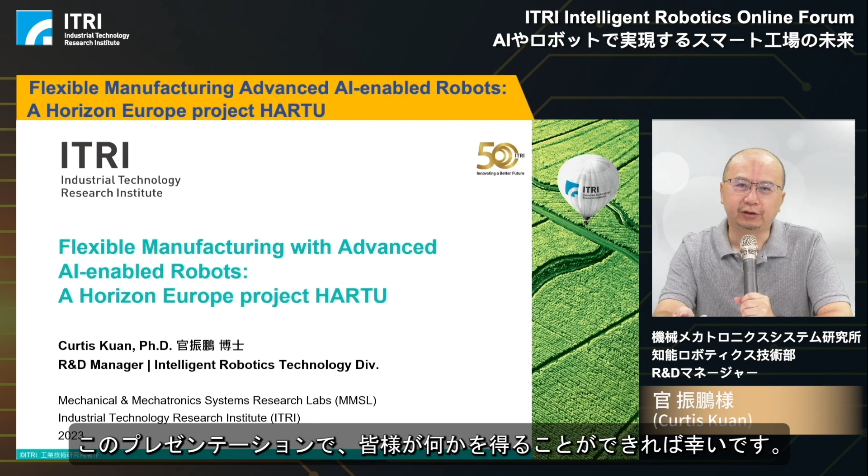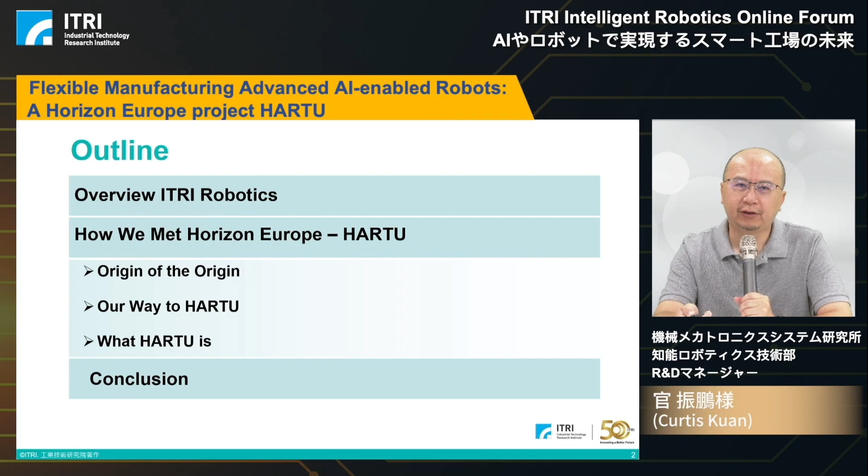First, here is the outline of today's presentation. First, a brief overview of ITRI Robotics is introduced. Then, how we joined the HARTU project, including the origin, the progress to HARTU, and what exactly HARTU is. Finally, a conclusion is provided.

As we know, ITRI was founded in 1973. It's an independent nonprofit innovation institution in Taiwan. Our scope is developing technology for commercialization and nurturing open innovation with academia, industry, and global partners. That is why I am here to introduce our global collaborations, especially with European partners. The other scope is incubating and spawning startups for emerging industries. As we know, the most famous spin-off companies are TSMC and UMC in semiconductor areas. Each has several offices around Taiwan and global branches in Tokyo, Japan, San Jose, Silicon Valley in the United States, and Berlin for European business.

Here is our basic information about ITRI. We have Tainan campus, headquarters in Hsinchu, and Taichung campus. We have many staff with PhD degrees, master degrees, and total patents around 32,000 and more.

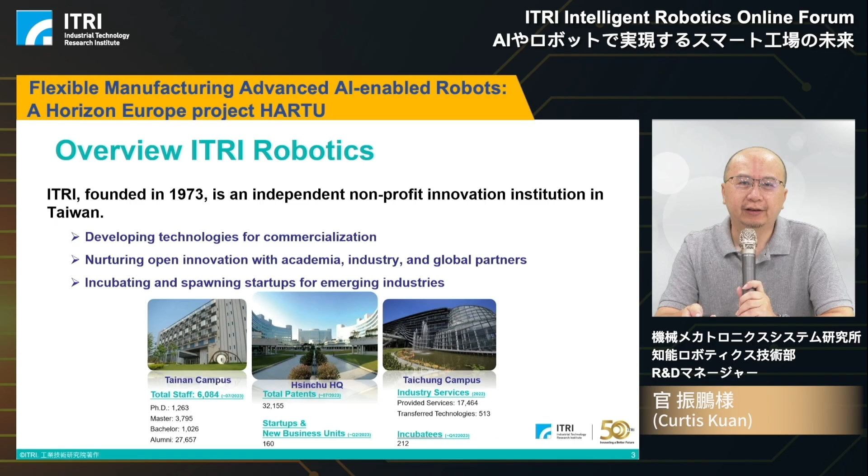This slide will introduce our robotics achievement in the past years. For the future, we have robotic development in ITRI. We have core technology related to controllers that we call I Can Think. The vision system for robotic system that we call I Can See. And several applications, use cases in the practical industrial area. We call it I Can Work, and the mobility, I Can Move.

For I Can Think, we especially developed the robotic controller and the navigation algorithm and simulators with EZSIM and ASim. The vision system for the robotic system we call FOVision, especially for object recognition and navigation.

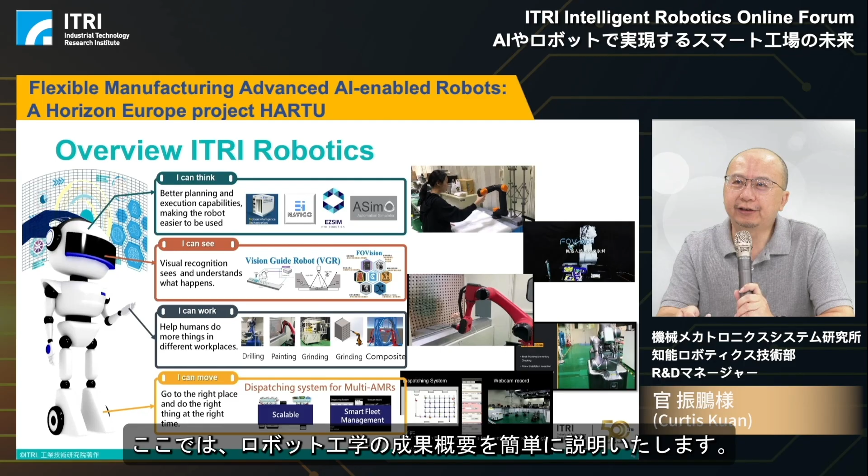And I Can Work, we have implemented several industrial applications such as in aerospace manufacturing, drilling, or painting for high-speed railway, and grinding and polish application for semiconductor instruments, and robotic weaving system for composite material handling. And I Can Move, we have developed the dispatching system for multi-AMRs, and a fleet management software for AMR systems. This system right now is introduced to a semiconductor plant. Furthermore, we also have medical robots as our focus, such as robotic bronchoscopy with diameter less than 3.5 millimeters. Here is our brief overview of our robotics achievement.

Here, the next page, we want to say how we met Horizon Europe, how to.

And I want to introduce the origin of the origin. From 2002 and 2003, we joined the European project called Muffins. This project is related to multimedia processing in the MPEG 21 environment. ITRI is one of the partners, and the other partners are Imperial College in the United Kingdom and IMEC for Belgium and other partners from all over the European countries.

And the other project from 2003 to 2005, we got another partner from Switzerland. Based on our research capability in the past, almost 20 years ago, we joined these two projects.

From these experiences with European partners such as Fraunhofer, Imperial College, IMEC, Vodafone, we have learned several lessons. The first one is the basic core concept idea is very critical. Use cases and user scenarios first. Then, based on this user scenario and requirement, we can implement the technology development.

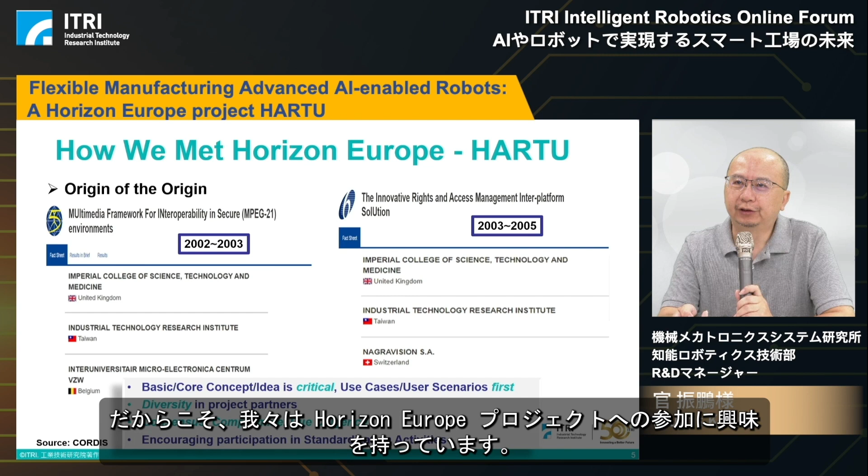And in these projects, they encourage participation in standardization activities and promote the achievement from the project to standardization organizations. So from these experiences, project achievement will be more applicable to the real and practical use cases in industrial applications. That's why we are interested in joining the Horizon Europe project.

So here is the slide showing our way to HARTU. In 2017, from the EU-Taiwan Industrial Policy Dialogue, we decided we need to discuss AI robotics. EU and Taiwan agreed to focus on the development of AI plus robotics and start the preparation of a robotics working group. And in 2019, we established the EU-Taiwan Robotics Working Group.

In this working group, we discuss regulations, policies, and joint research topics, especially on AI, data, and robotics. This group is established based on the consensus of European Commission Director Generals, for example DG Grow, DG RTD, and DG Connect, especially for ICT technologies.

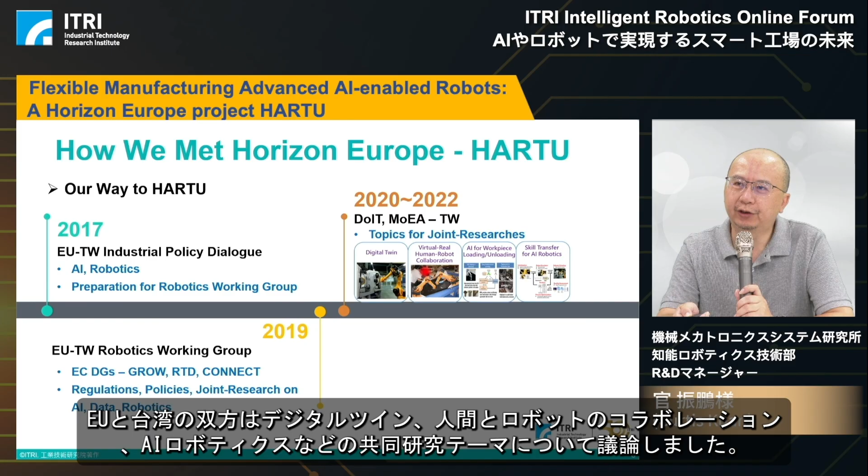Through 2020 to 2022, both sides of EU and Taiwan discussed joint research topics, including digital twin, human-robot collaborations, and AI robotics.

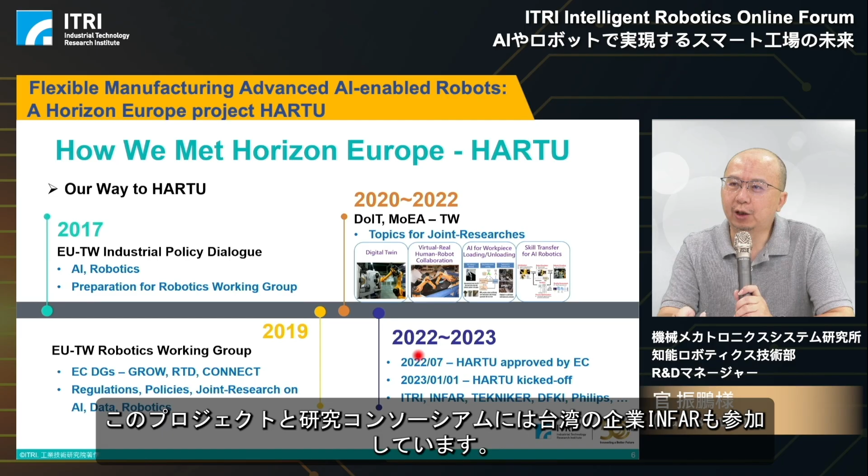Based on our consensus from both sides, in 2022, ITRI cooperated with the German AI Research Center DFKI, the Spain Research Institute Tekniker, Philips Consumer Electronics, and the Turkey automobile company, forming a research consortium. We call it HARTU. This project got approval by the European Commission, and the project kicked off this year in January. In this project, there is a company from Taiwan, INFAR, which also joined this research consortium.

In HARTU we want to focus on 5 use cases. The first one is fixtures assembly, especially for hand tool manufacturing, and this use case will be implemented by ITRI and INFAR, the Taiwan partners. The second use case is assembly for consumer electronics, implemented by Philips and Tekniker, and this use case is from the Netherlands.

And the logistics use case and car assembly transport, this use case is implemented by Tekniker and TOFAS, the Turkey automobile manufacturer. And especially for the packaging use case, it's about food handling, implemented by the Italian partners, Poliva.

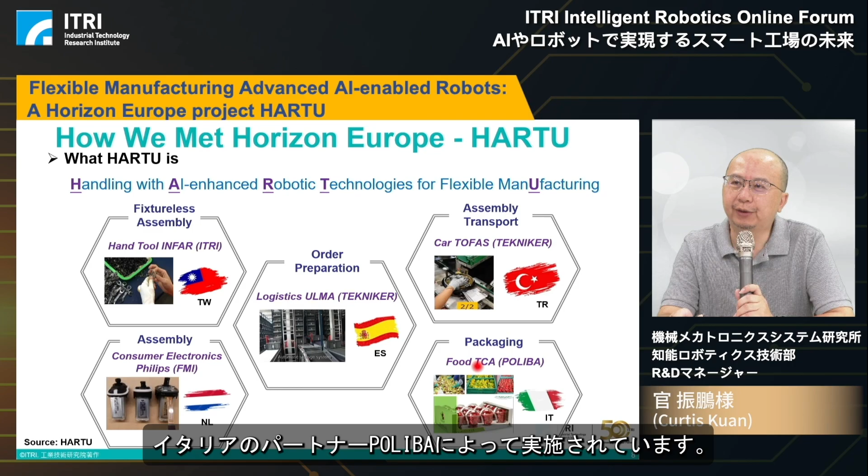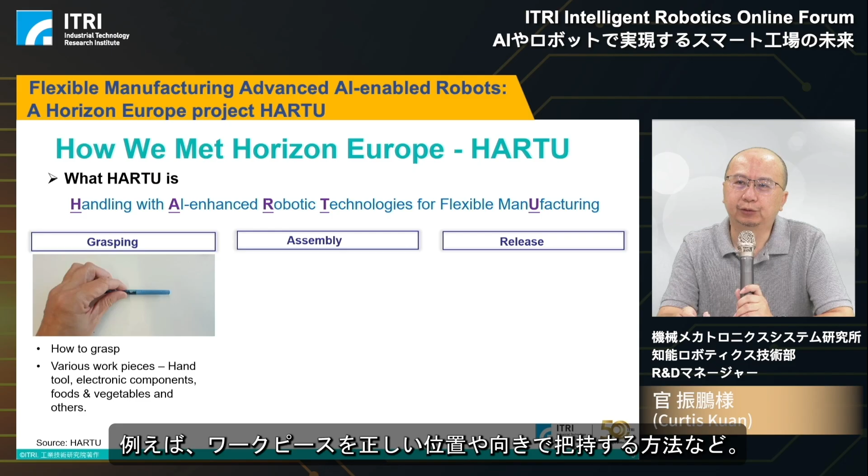In these use cases, we want to focus on how to grasp a workpiece, such as how to grasp the workpiece in the right position and the right orientation. We will handle various workpieces such as hand tools, electronic components, foods and vegetables, and others. From grasping, we need to assemble all the components into one product, so we need to handle the contact force, assembly procedure, accuracy, and compliance between the workpiece and the adaptation to various workpieces with different sizes and weights.

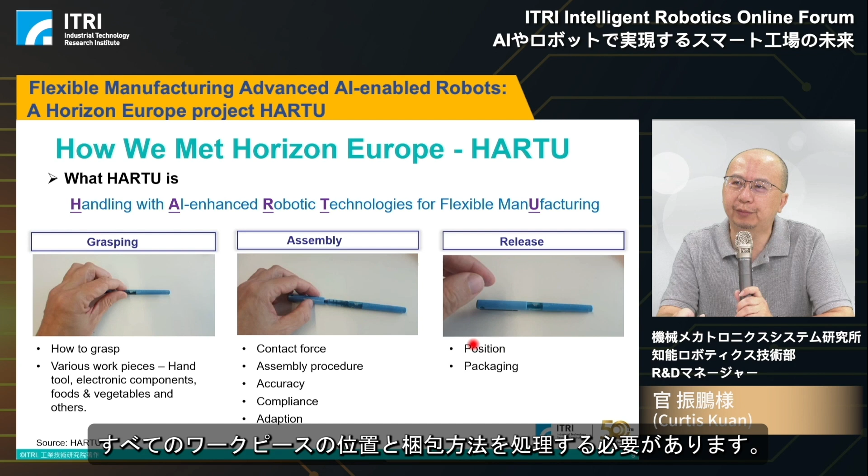And finally, we have to put or place the assembled product into the right place. So we need to handle the position and how to package all the workpiece. So here is our scope for the HARTU project. And finally, here is a brief conclusion.

HARTU is a real international research project with 6 countries without mother tongue as English. So by participating in this project, we will learn how to cooperate with various countries from Germany, Spain, Italy, Netherlands, Turkey, and Taiwan. We have to achieve consensus and compromise with each other, and do the assigned work with due diligence.

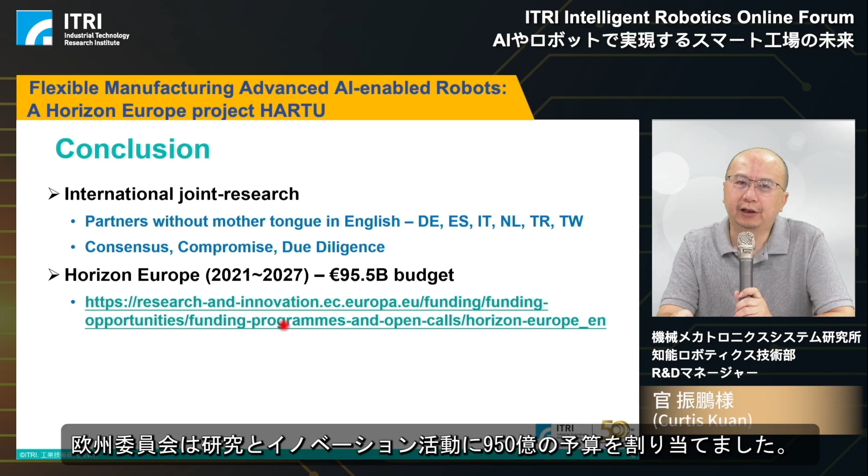Here is the reference for the Horizon Europe Cooperation Framework. The European Commission has assigned a 95 billion budget for research and innovation activities. In Horizon Europe there will be 49 European partnerships, including several clusters, for example health, digital, industry and space, climate, energy and mobility, food, bioeconomy and agriculture. For us, we will pay more attention to AI and robotics.

So here is for your reference. If you are interested in participating in an EU project, we can cooperate.

Based on our experiences cooperating with EU partners, we have learned due diligence, compromise, and consensus. As I said during the presentation, we can have arguments during the design phase, then consensus can be achieved, followed by due diligence. We keep our promises to fulfill our responsibilities. So this is what we have learned from cooperation with the EU.

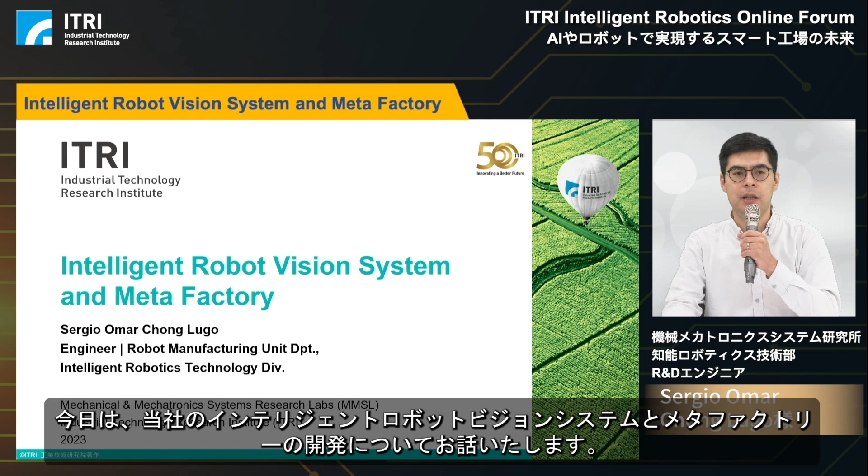Hi everyone, I'm Sergio, an engineer from the Robot Manufacturing Unit Department at ITRI. Today I will talk about our intelligent robot vision systems and meta factory developments. I'm going to introduce two key products developed by our department, which are RoboTwin and FOVision.

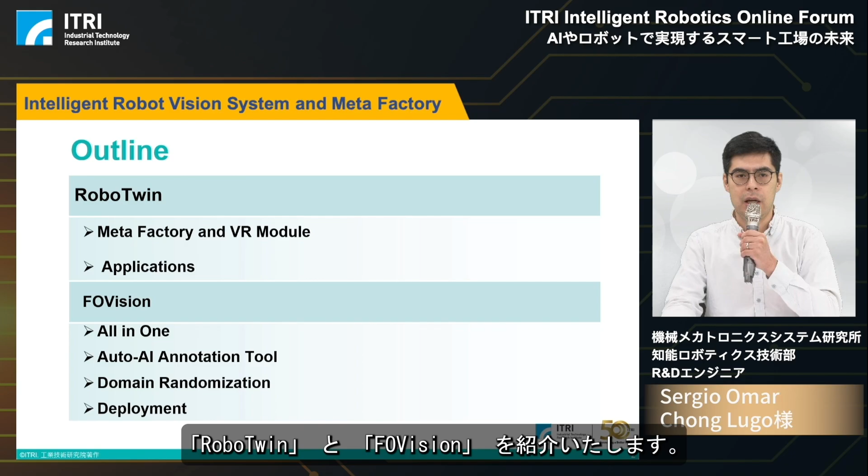Nowadays, in the context of global connectivity, increased demand for efficiency, and an accelerated production pipeline, businesses are making their physical factories described entirely in terms of software. No matter where users are located around the world, with the aid of 3D digital environments, virtual reality deployment, and a communication scheme between digital and real assets, users can perform sensitive operations in the digital world and bring optimizations to the real world. This is the idea for MetaFactory, which serves as a realistic virtual environment replicating actual factory layouts, robotic cells, and workpieces.

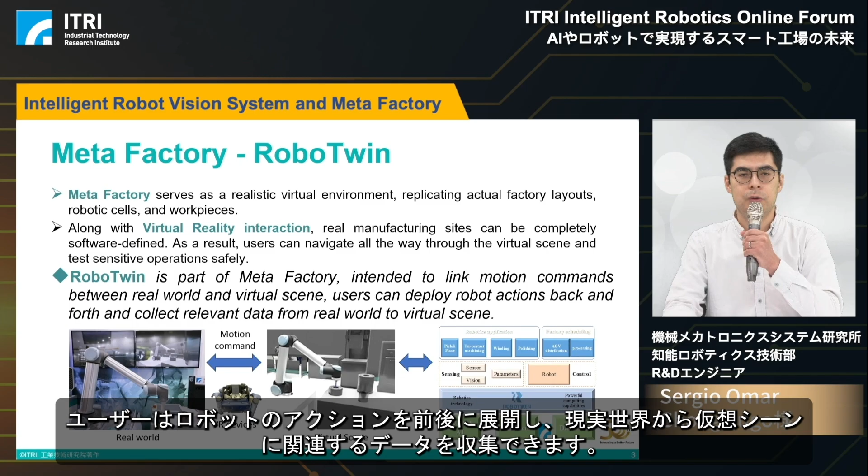Along with virtual reality interaction, real manufacturing sites can be completely software-defined. As a result, users can navigate through the virtual scene and test sensitive operations safely. More specifically, RoboTwin, as part of Meta Factory, intends to link motion commands between the real world and virtual scene. Users can deploy robot actions back and forth and collect relevant data from the real world to the virtual scene. The purpose of RoboTwin is to achieve capable human-machine cooperation by connecting VR equipment combined with a high-fidelity physical engine from NVIDIA Omniverse, resulting in human-machine mixed-line interactive simulation technology.

Here we have one video. For instance, the user is wearing a VR headset and also grabbing a virtual stick, using one of the VR controllers, making the virtual robot follow the stick. This action is related to robot teaching.

In another case, we have a user wearing a VR headset. Meanwhile, the virtual robot is performing defined motion commands, and compounds of data coming from the real world in the form of images and other graphics are projected into the virtual environment for the user's interest.

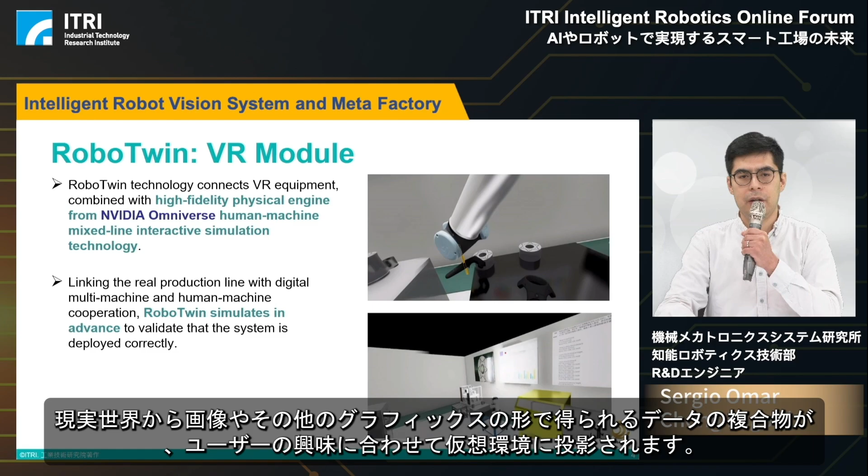RoboTwin comes with two operation modes. The first one is known as Follow Target mode. In this mode, the user grabs the virtual stick and the virtual robot will follow this tool in real time. Therefore, joint states will be shared to the real robot, resulting in real-time synchronization.

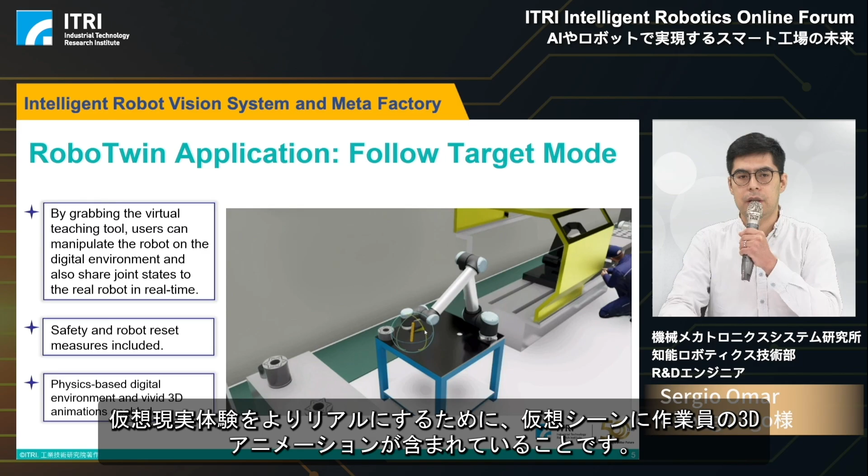Robot safety is also considered, along with a virtual reset option to prevent both robots from any undesired displacement. One more feature here is that 3D animations of the workers are included in the virtual scene to make the virtual reality experience more realistic.

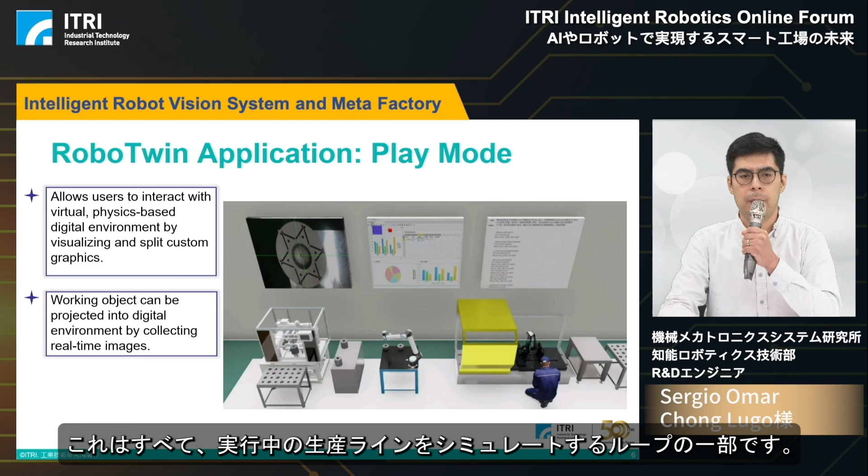Let us now refer to RoboTwin's second mode, known as Play Mode. In this mode, the virtual robot is given defined motion commands. Those are shared to the real robot to achieve real-time synchronization. At some point, data from the real robot is collected and projected into the virtual robot. This is all part of a loop to simulate a running production line.

Now let us proceed with our second product known as FOVision. FOVision mainly consists of three pieces of hardware: a 3D camera, a particular lighting source, and an edge computing device. The system will collect light-controlled 2D images along with 3D point cloud data to be processed by an embedded AI object recognition model.

At the same time, the system will compute pickable points over the work pieces, and it will command the robot arm with inverse kinematics to perform pick and place operations.

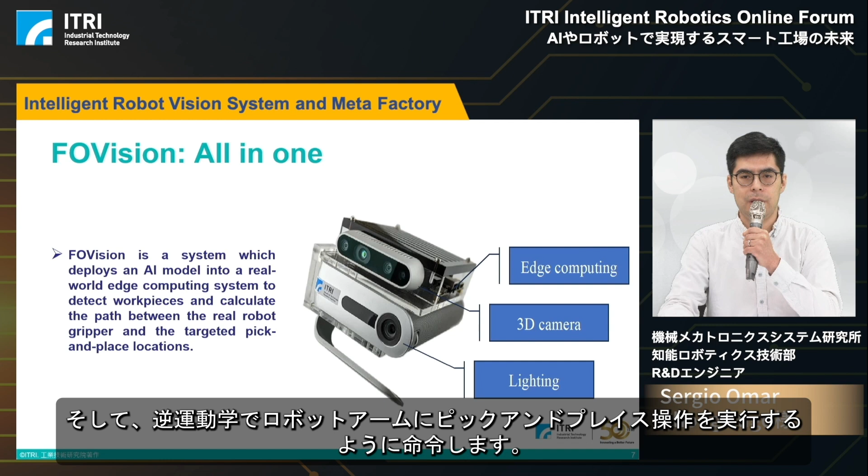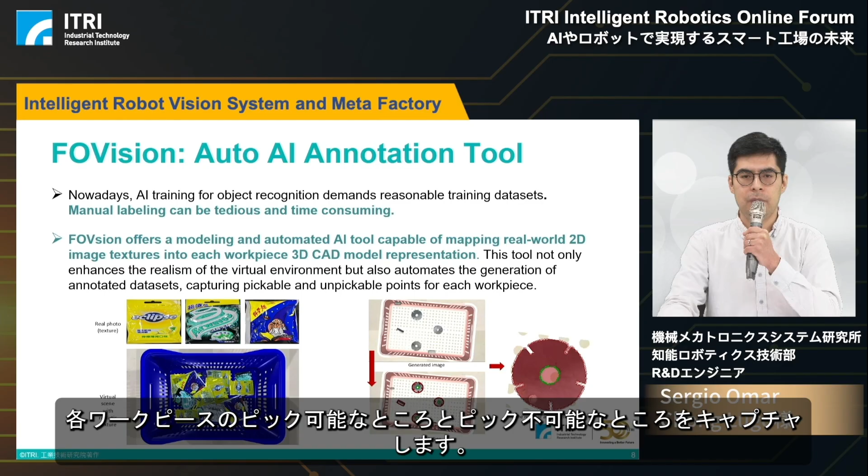AI training for object recognition demands reasonable training datasets, and manual labeling can be tedious and time-consuming. In contrast, FOVision offers a modeling and automated AI tool capable of mapping real-world 2D images into each workpiece 3D CAD model representation. This tool not only enhances the realism of the virtual environment, but also automates the generation of annotated datasets, capturing pickable and unpickable points for each workpiece.

To ensure valid training dataset acquisition, the AI annotation tool makes use of our domain randomization approach. Several parameters will vary, such as workpiece posture and quantity, camera lighting and posture, light intensity and color rendering. Here we can observe how the algorithm changes the bin color, and the objects are placed randomly with variations that make the training dataset stronger.

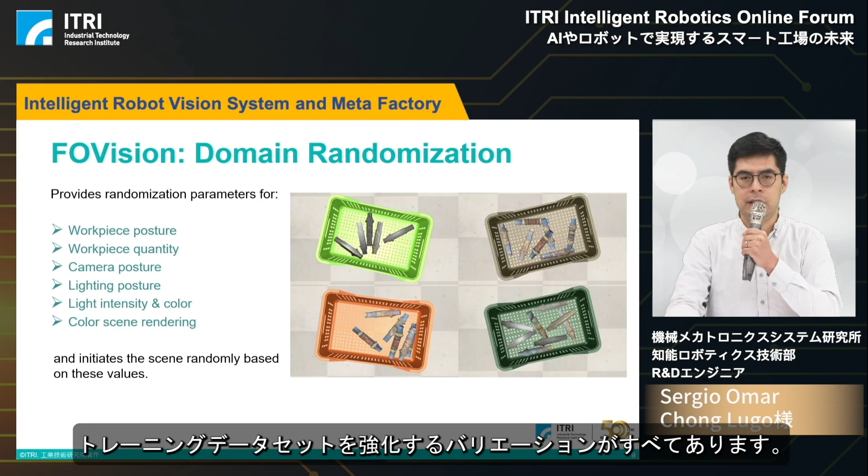With all this being said, let us observe FOVision deployment. Considering a real working environment, FOVision collects data from a container loaded with metallic pipes and commands an industrial robot arm. The synthetic training dataset generated to train the embedded AI object recognition model proves valid in this case. Here we observe the objects loaded into the container, and then we can see the masks obtained by the AI object recognition model.

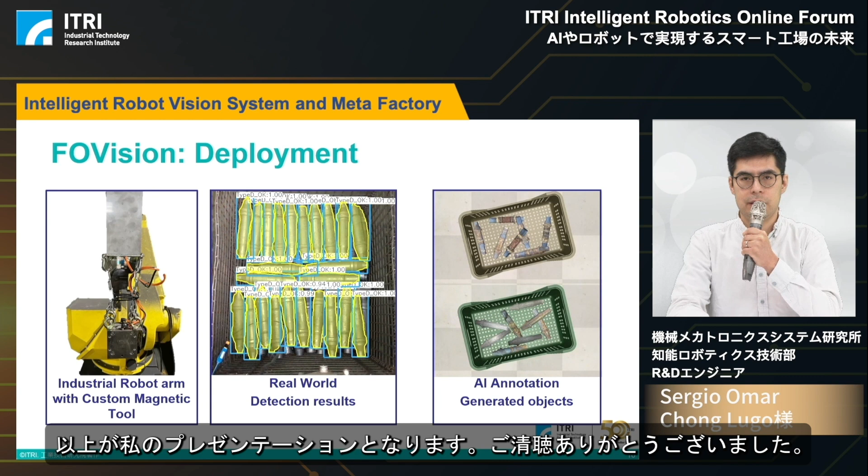And all of this is the result of the trained dataset, which has the variations mentioned before. So this is all for my presentation, and thank you for your attention.

Thank you for this question also. Let me mention that we also follow the instructions given from the VR set maker, and at the same time we connect the robot to the PC by TCP/IP protocol. So this is quite a straightforward action. You will find it quite accessible to set up the system if you follow our example, which uses the UR10 robot and this HTC headset. In general, it is a very easy setup, and if you really need to ask questions, we are always ready to help you.

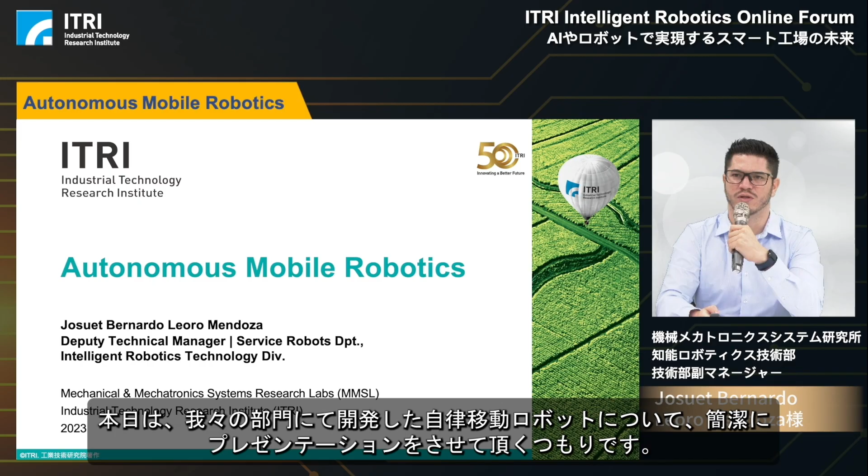Hello everyone, my name is Josuet. I'm the Deputy Technical Manager of the Service Robots Department, and today I'm going to give you a short presentation about the autonomous mobile robots that we have developed in our department. My presentation will consist of two parts. First, I'll give you a short presentation of the intelligent AMR solutions we have developed. Then, in the second part, I'll show you some interesting applications where we combine robotics with arts.

In our department, we have been developing autonomous mobile robots for quite some time, but we have also developed other types of robotic systems. For example, we develop a human-like robotic hand.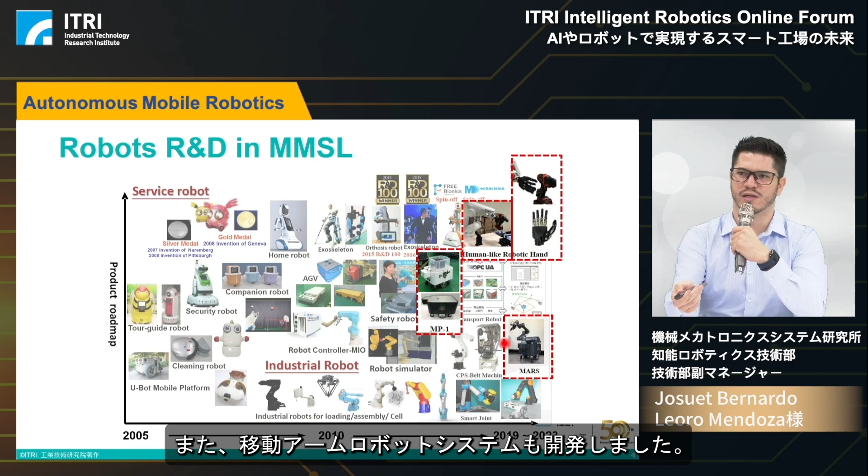Regarding autonomous mobile robots, we have developed some mobile-based robots. This one can carry 100 kilograms, but we have developed platforms for 250 kilograms, and we are hoping to develop soon platforms for up to 2 tons. We also develop mobile arm robotic systems, like this robot here called Mars Lite.

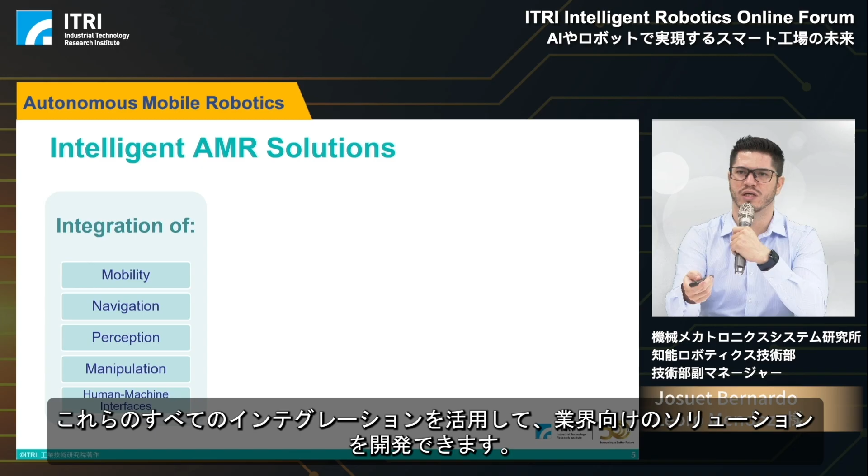In our intelligent AMR solutions, we need to integrate mobility, navigation, perception, manipulation in the case of mobile armed robots, and also human-machine interfaces to use these robots. Using all this integration, we can develop solutions for the industry.

For example, the mobile armed robot here can be used for pick-and-place applications and other applications that require the robot arm. We have also developed applications for the autonomous forklift, where we developed technology to perform the pick and place of a pallet.

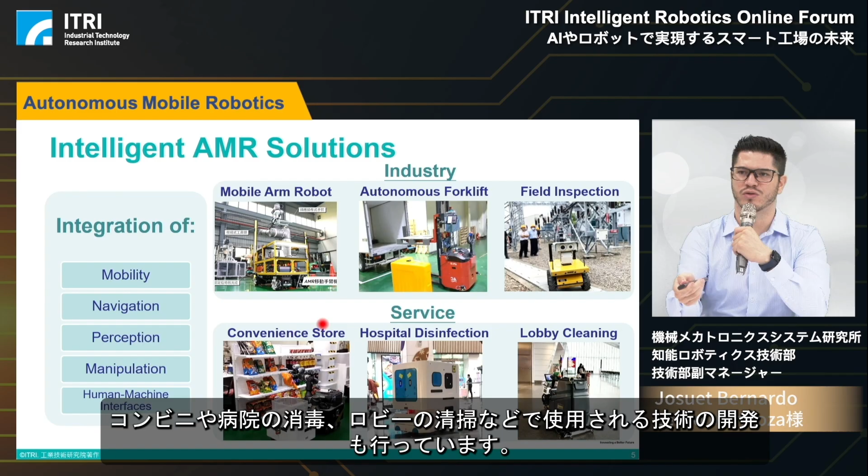We have also done some outdoor mobile robots, where we use a robot to monitor an outdoor area for some companies. In the case of service applications, we have also been developing technologies to be used in convenience stores, hospital disinfection, and lobby cleaning.

Now, for industrial applications, I'm going to give you two short case studies. The first one is pick and place in a manufacturing cell. As you can see in this video, this holonomic mobile manipulator is picking a workpiece from this manufacturing cell, and then it will place it in other locations around this manufacturing cell.

This was done to mimic a real manufacturing cell where we have multiple processes that these workpieces have to go through, and this mobile manipulator will be in charge of moving around these workpieces.

We also use the same mobile manipulator to perform other specific tasks. For example, here we have the LCD carrier polishing, where we use the mobile manipulator to approach this LCD carrier, and then we perform the polishing in 4 steps.

As you can see in this video, we're polishing the first quarter of this LCD carrier, and then the robot will move to the 3 other locations where we will perform the polishing task.

For these industrial applications, we developed the following technologies. First, we develop a task manager and a task executor. The task manager will take the tasks one by one, and it will use the task executor to execute this task. Combining these technologies, we can do quick reprogramming of the robot.

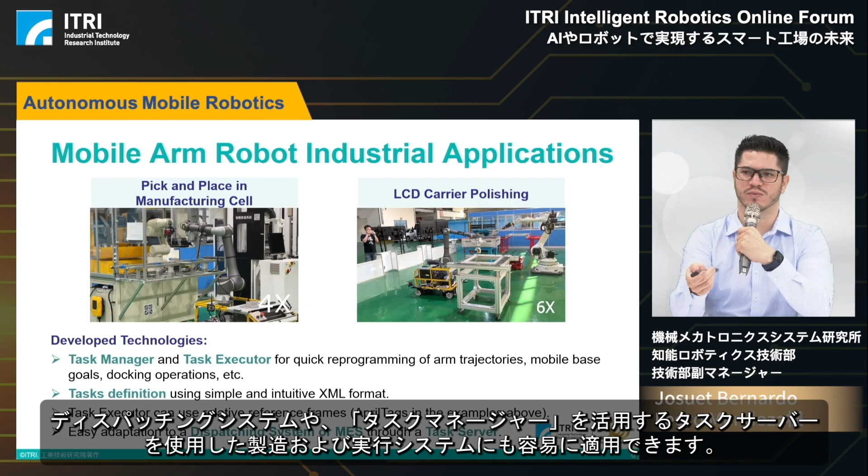This task executor can also use relative reference frames. For example, in the 2 videos I showed you, we use April tags to reference how the movements are going to be done. These 2 technologies are also easily adaptable to a dispatching system or a manufacturing execution system using a task server, which leverages the task manager.

Now, in the case of service applications, we have lobby cleaning, as you can see in the top left. This is an Ackerman type robot, and we adapt our technology to this existing cleaning robot to perform lobby cleaning. Here you can see the robot performing a cleaning trajectory that we computed based on the cleaning area the user wants to cover.

We also have hospital disinfection, which uses similar technology where we can select the areas we want the robot to clean, and also select areas the robot should not go to. This was already applied in the National Taiwan University Hospital here in Taiwan.

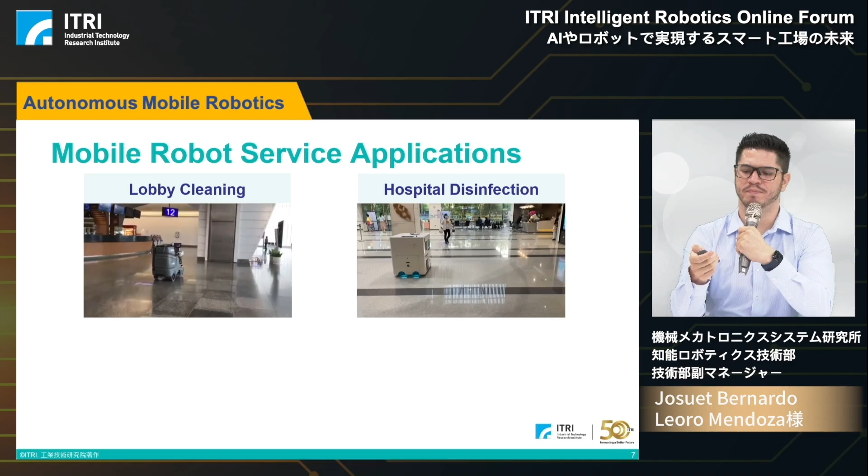The technology we developed for these 2 service applications was a multi-area, multi-block cleaning path generation. This means that if you have a big map and want to clean multiple areas, you can select these multiple areas one by one, and also select some blocks that you want the robot to avoid.

And then the robot will find the optimal path to move between these two areas. And we can also select the forbidden areas, which are the areas that we don't want the robot to go, maybe because we're doing some maintenance there or for any other reason.

We also developed an intuitive operation, an Android-based HMI, as you saw in the lobby cleaning case, where we have the screen to select the map we want to use for cleaning, or to select the task schedule or other tasks. This selection of the allowed and forbidden areas can also be done through this HMI, and we can also generate the task schedule for all the tasks using the HMI.

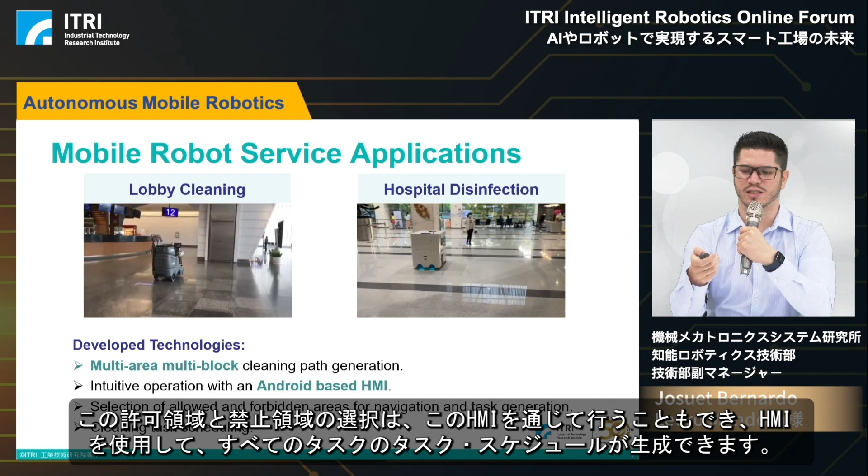Now, we also have been doing some research to execute complex trajectories with mobile manipulators. As you can see here in the top left, the robot is moving around this Lissajous path, and it's continuously tracking this trajectory while it moves. You can also see in this second example that the robot is following a sinusoidal path.

This type of trajectory can be used for certain applications where you actually want the mobile base and the robot arm to move continuously. A simple example is if you want to open a door, you might need to do this. You can do it step by step, first moving the platform and then moving the arm, but a more optimal way is by coordinating the movement of both the arm and the platform to open the door.

And the technology we developed in this case is the coordination of the robot arm, and in this case it was a non-holonomic mobile base, but we can adapt for holonomic and non-holonomic. The non-holonomic case is just more challenging, so that's why we worked on it.

We also had to do the redundancy resolution to execute these complex trajectories, because this is a 10 degrees of freedom robot arm. And because this is a highly redundant robot, we also need to consider singularity avoidance to allow the robot to perform this task.

We also included self-collision and joint limit avoidance as constraints to execute all these paths. So in both videos, what you saw was the robot executing this task while continuously avoiding singularity, self-collisions, and joint limits.

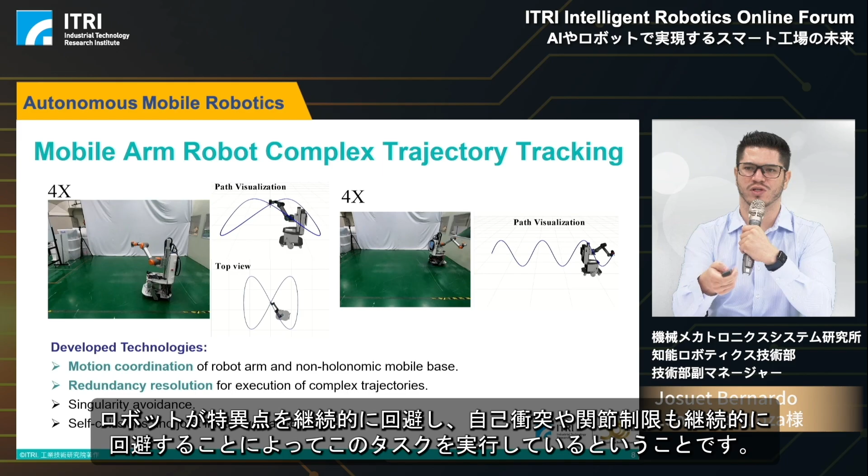Now, in the second part, as I said, we're going to show you some examples of how we combine robotics with arts. In the first case study, we have the Three Person project by the artist Taoya Leung. This project was presented at the Patch Lab Digital Art Festival last year in Krakow, Poland.

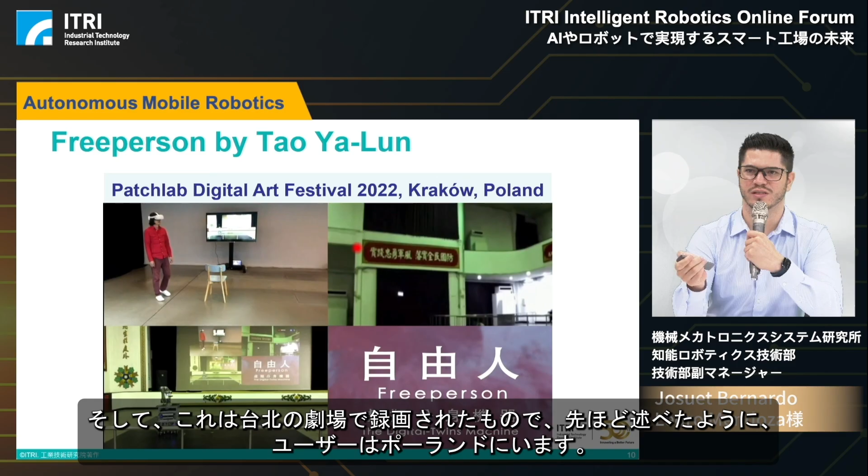So right now, as the user—in this case the artist testing our project—is moving around this area, the mobile arm robot will follow his movements, both the movements of his head and his location around the area. As you can see on the stream, we're constantly streaming all the movements so that the user feels like he's actually in Taiwan. This was recorded in a theater in Taipei, while, as I said, the user is in Poland, in another country.

Now, for this specific case, we needed to develop an arm target follower. As you can see in this video, the arm is following the movements of the headset as the user moves around. We also needed to develop a mobile base target follower, and in this case, the mobile base needs to follow a target.

And the arrow here is pointing to the direction that we have our target right now. And while it does so, we also have to consider there might be some obstacles around the environment, so it needs to avoid moving to those areas.

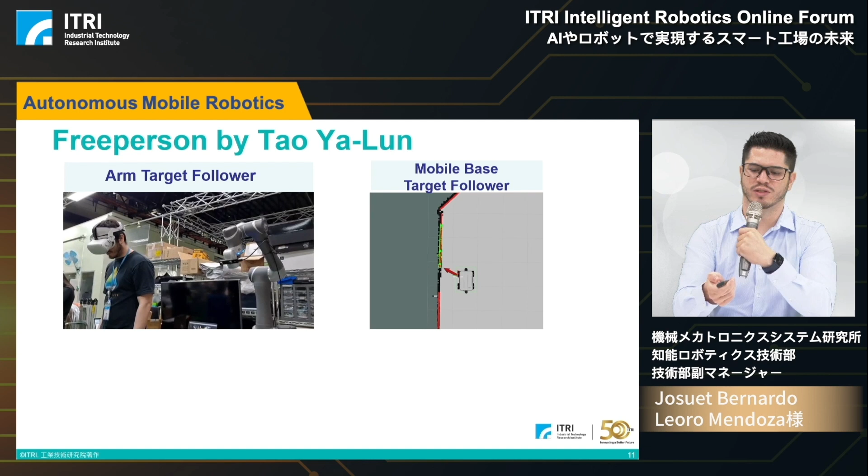Now, the technologies that we developed for this project was a remote control for the mobile arm robot. This is a remote control from a different country to Taiwan. We developed a smooth Cartesian velocity control for the 6 degrees of freedom robot arm, as you saw here with the movements of the arm. This target follower also needs to consider the constraints like joint limits and workspace limitations.

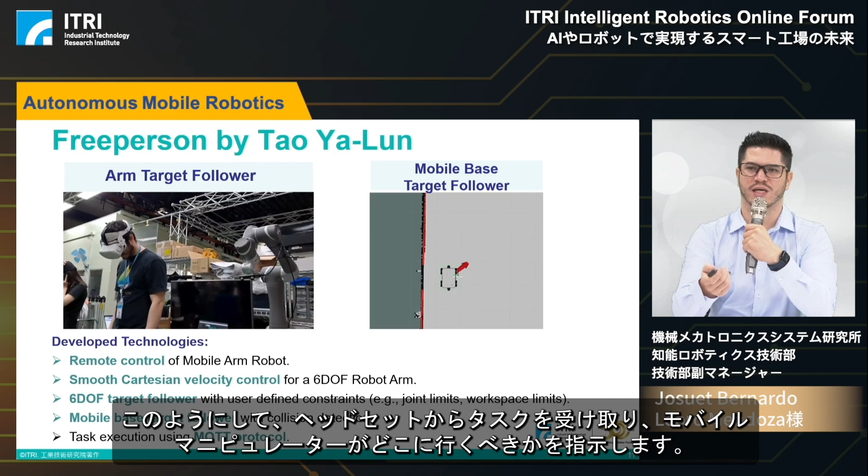And for the mobile-based target follower, we included the collision detection, as I just mentioned. All the execution that we performed was using the MQTT protocol. So this is how we receive the task from the headset to tell us where the mobile manipulator should go.

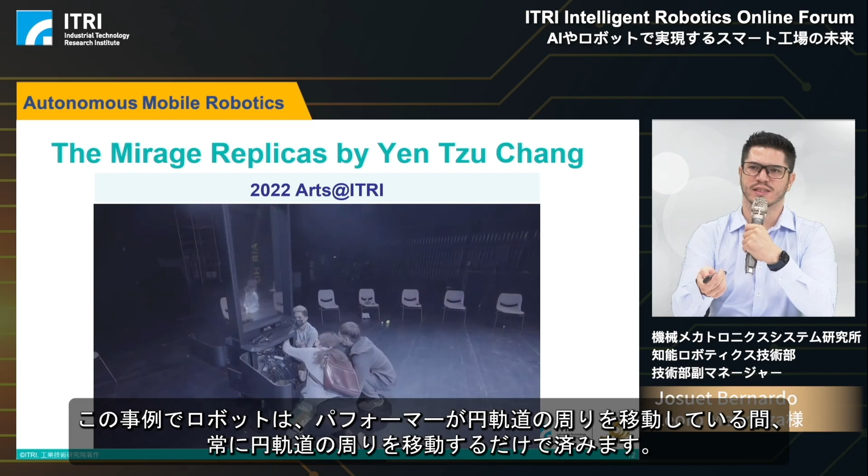Now, the second study case, we have this artist ask us to perform the movement of a mobile platform in this circular trajectory that you're seeing in this video. In this case, the robot must just move around this circular trajectory constantly while a performer is moving around it.

And the challenges in this project were that first, the lighting conditions change a lot. So we have really dark areas when the performer is moving around, and we also have a lot of light in some areas. As you can see here, the mobile base is already moving around this circle. The problem was that because the audience is going to be seated around the performance area, there is no way to acquire features to actually localize the robot inside this circle.

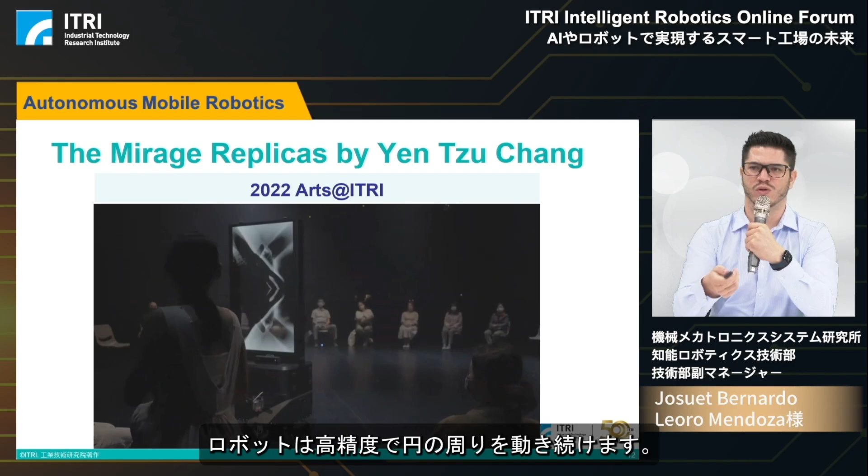So the challenge was how we can actually develop some localization algorithm for the mobile platform so that it can move around accurately inside the circle. As you can see here, the performer as it is moving around the circle, and we're showing some video through this transparent screen, the robot will keep moving around the circles with high precision.

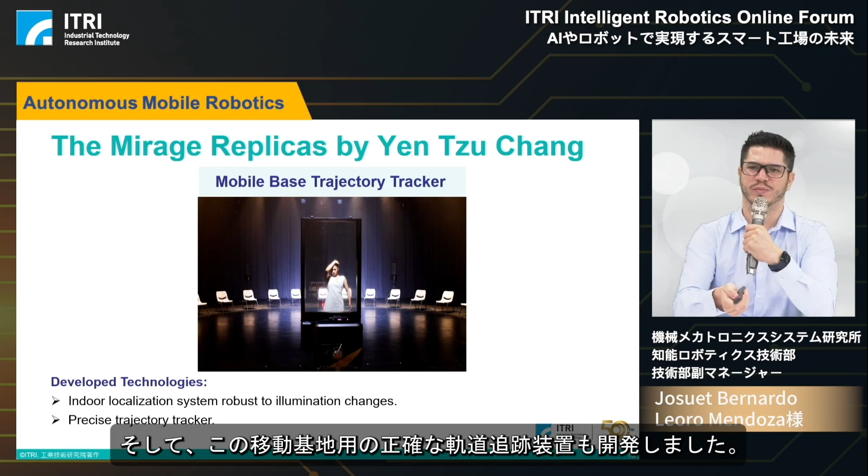Now, for this specific case, we developed an indoor localization system that is robust to illumination changes. We also developed a precise trajectory tracker for this mobile base. This is the end of my presentation.

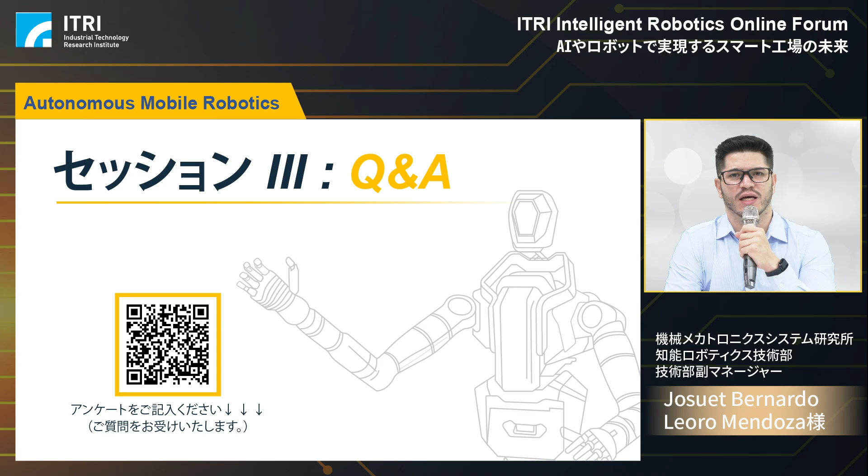I think that the large language models will have a large impact in the development of human-robot communications for mobile robots. Using this natural language to command a mobile robot is a useful feature that can be used in many applications, and this is especially the case for service robots.